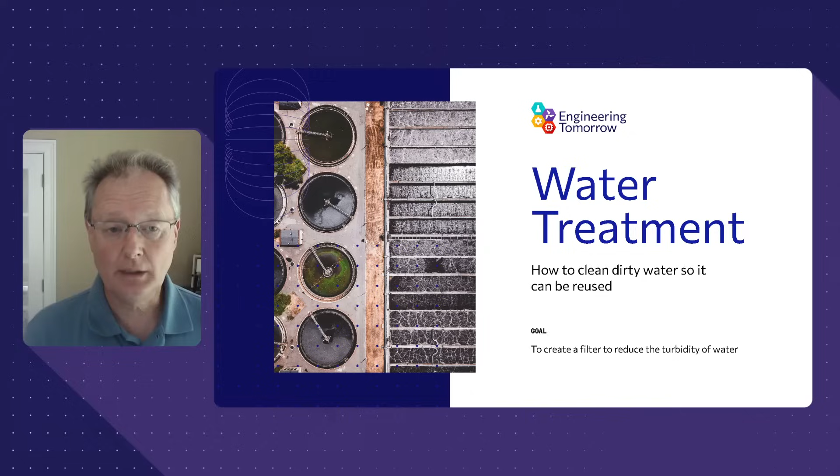So what I'd like to do is take you through the water treatment lab, and I hope you'll have some fun doing this. I'll give you a feel for how water is processed. We are used to just turning on the tap in your house and clean water comes out. Not everywhere in the world can that happen, and there's a lot of engineering that goes into making that actually happen.

As you may know, our labs are all developed by engineers and delivered by engineers. This one was developed by Edgar Martinez, who was a civil engineer. And then we also have engineering college students that help us out, and Mona and Caroline helped on this one.

So first question is, do you know what your water footprint is? Now, you may have heard of your carbon footprint, which is what is it that you do? Where do you travel? What is it you use that creates CO2? But what about your water footprint? A lot of people don't think about this because you use water for drinking and for cooking. You use water in your toilet, for showers and for baths.

That's the obvious stuff. But it turns out your water footprint is a lot bigger than that, because a lot of the products that you use use water, and a lot of them use a lot of water. Other than drinking, what did you use your water for today? And also, how many times have you used water?

So let's talk about what's in water that makes it contaminated. Roughly you can divide it into three different areas. One is suspended solids. So that's like you can see in that cup. It was a cup of clean water, but there's a bunch of dirt and gunk and things floating around in it, and it looks really gray and ugly. And you probably wouldn't want to drink that just because you don't know what's in there.

Now, those suspended solids, the good thing is they don't dissolve in the water, so you can see them. And you can actually filter them out, and you can also agglomerate them and settle them out. And that's what you're going to be doing in your lab. You're going to be filtering these suspended solids out. So that's one class of material that contaminates water.

Another class of materials are what we would call dissolved solids or dissolved materials. Probably the most common, or the one that you'll know the easiest, is salt. So the ocean has a lot of dissolved salts in it. That's why if you get ocean water in your mouth, it tastes really salty and disgusting.

That's a little harder. Those are already all in the water, and they're on a molecular or atomic level, and you can't just filter those out. You need to remove them through some chemical process quite often. One is called softening or ion exchange. Sometimes you can remove them through a membrane process, which is a reverse osmosis process.

Sometimes you can remove these materials, which can include gases, just by aeration or de-aeration. So basically getting the gases to release. Like for example, in your soda bottle, there's carbon dioxide in that. That's what gives it bubbles. And when you open up that bottle, you hear psst, and that's the beginning of the release of those gases from that water. So that's another type of material that contaminates water.

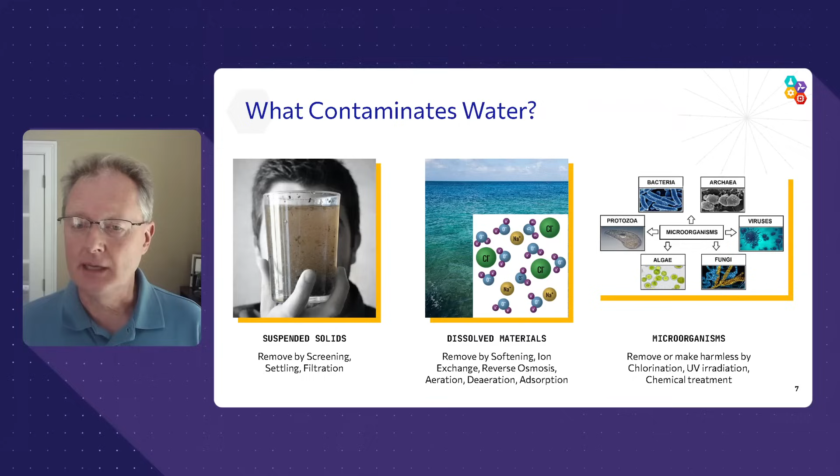And as a result, there's a lot of life living in water. So that's where you got your bacterias and your algae and your funguses and your viruses and protozoa. And if you're taking biology, you've probably recognized all this. Basically, the way you approach removing them is by killing these bacteria, so that if you do ingest them, they don't grow in your body and make you sick.

So the way that's done is usually through chlorination, putting chlorine ions in water. That'll rip these things apart and make them benign. Or you can also do it through ultraviolet radiation, radiating the water. That can also kill these microorganisms.

So in general, you want to have multiple process steps where you remove each of these in different types of process steps. And that's how water treatment works. It's typically not a single step. It's a multi-step process, which is very much what chemical engineers learn, and is very much a part of chemical processing. Water treatment is a multi-step process.

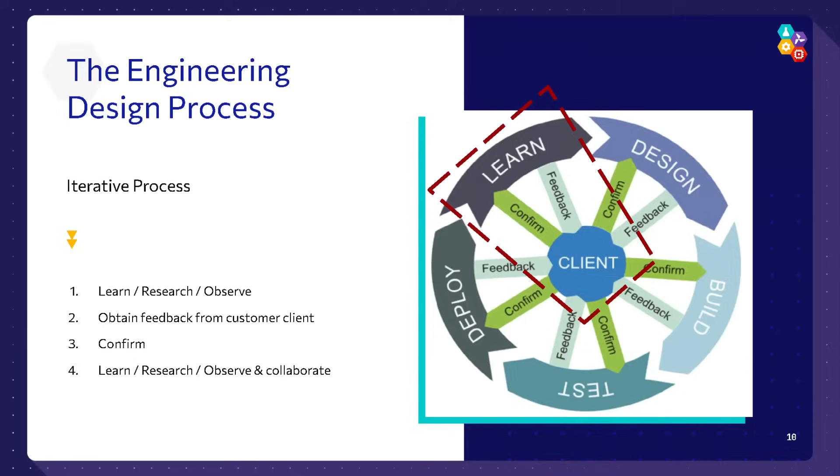So you've heard, I'm sure, of the engineering design process. Engineering is an iterative process. You'll use your basic skills in math and science and chemistry and biology and physics. And you'll get concepts, you'll put together a trial, you'll try it out, and you always have to try it again because you'll see things that don't work quite right. So it's a constantly iterative process.

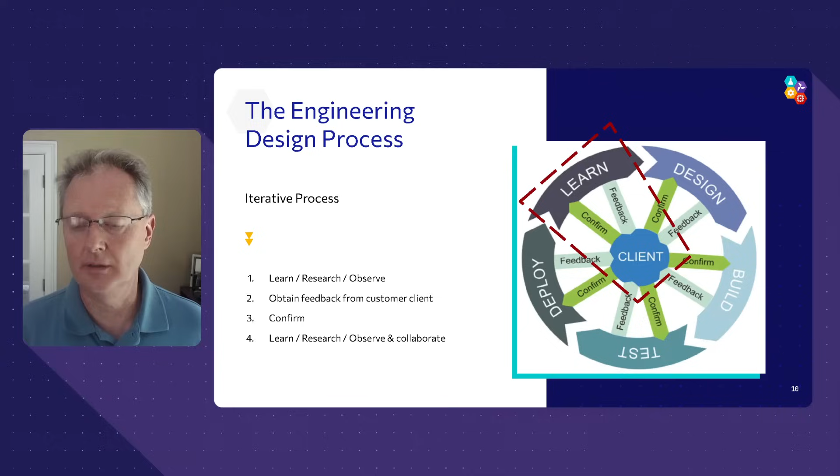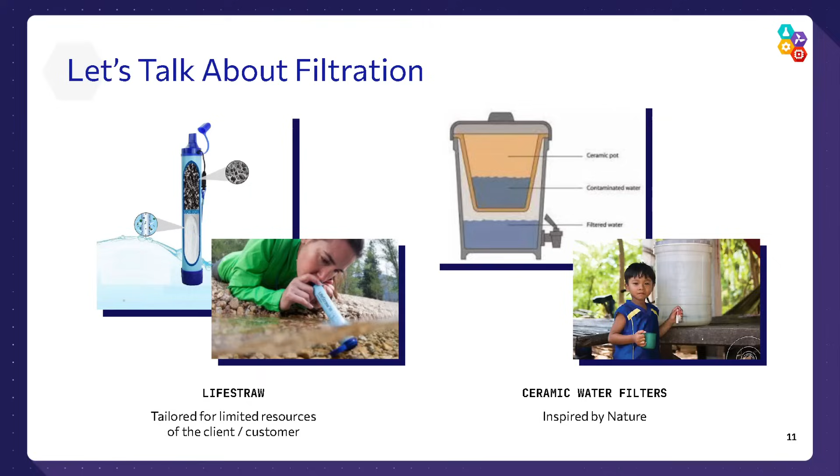I think there's probably a limit to how good water you can use this with. And then these ceramic water filters just give you an idea of another design process. And it says inspired by nature. I mean, quite often we look at how nature naturally treats water. The water cycle on Earth is naturally a cleaning process, and it's a great motivation and a guide to how we can then try to replicate that.

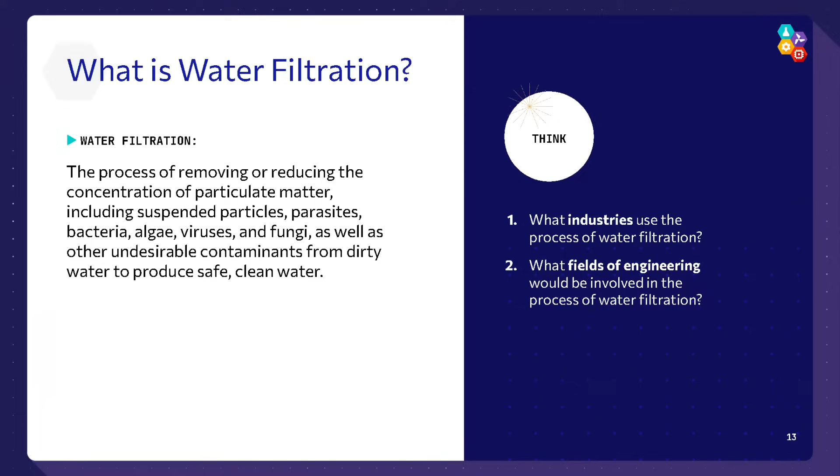This lab is going to focus on the filtration process. So what is water filtration? Again, it's the process of removing or reducing contaminants that are not dissolved in the water. So they're suspended solids. And what you're going to do is you're going to actually be using a variety of materials, filter materials, to try to design something.

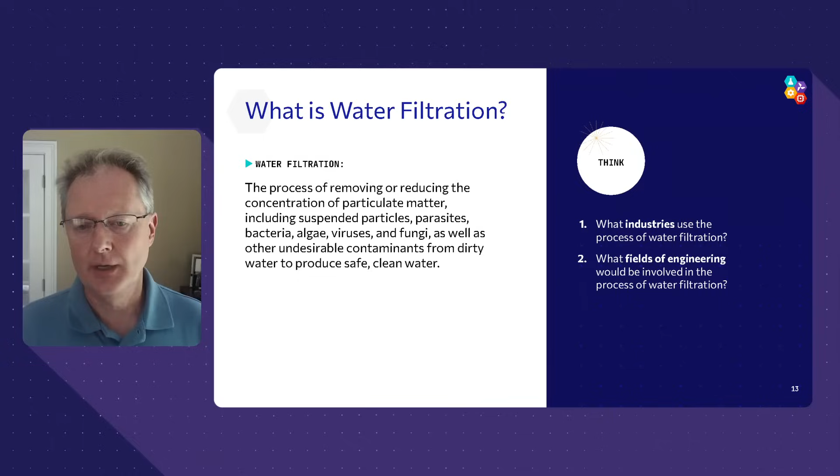So what industries use the process of water filtration? Pretty much every industry that uses water and has to have a water treatment plant so that they don't actually get it directly from their municipal source. But almost every process has some sort of filtration process. So this is quite fundamental.

So I've mentioned a multimedia filter a couple of times. So basically a multimedia filter is exactly what it says. Media is the material that you put in your filter. So it's the sand, it's the gravel, it's the stuff that you're going to have your water flow through, and it's going to capture those suspended solids. So a multimedia means that you have many different types of media. So this is an example of a multimedia piece of equipment.

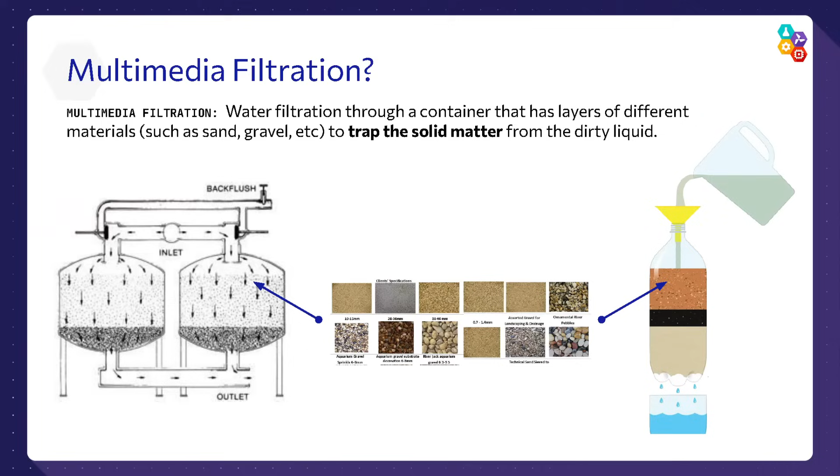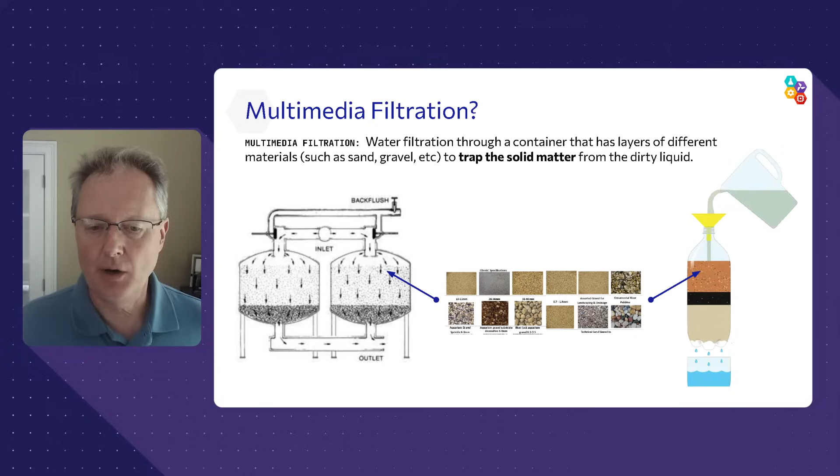You can see there's two tanks here on the left-hand side where you have water flowing in and the clean water is coming out. Obviously, you capture your contaminants in the media. So every once in a while, you have to stop the process, backwash it, actually have water flow back the other way. And then you can see there's a back flush valve there. That cleans the media out, and then you can start using it again. So that's a multimedia process. You're going to be making something that looks a little bit like what's on the right here, but we're going to show you how we're going to set that up.

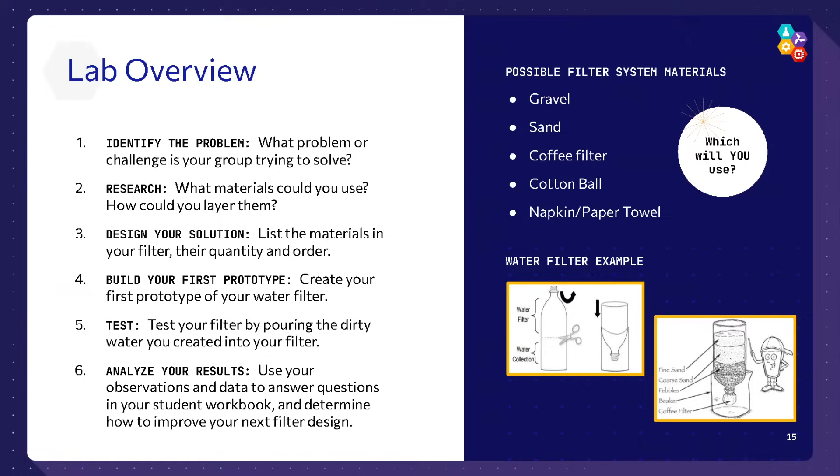So this is a better picture of what you're going to do. What we've done is we've provided you with a variety of media. So you should have some gravel, some sand. There should be some coffee filters, cotton balls. You can use napkins or paper towels. Maybe you can find other things. And what you're going to do is you're going to start with a plastic bottle, which you should have. You're going to cut it in half. And now you have the bottom of your experiment.

And then you're going to turn the top upside down, and you're going to build your multimedia filter in this top piece. So you can have layers of your materials in the top piece. One of the challenges you're going to have is how do you make sure not everything falls right through the cap of your bottle. You have to have some kind of a seal there or some way to hold it in place. You need to think about, what should I put in first? Should I put the finest material first, the coarsest material first? Let's think about if you wanted to capture first the coarse stuff and then the fine stuff later, so you don't clog up your filter. And that's going to be your filtration system.

So here's a few hints to how you want to think about it. You should try to build multiple. First of all, put thought into how you're going to design your filter, and then what is going to be, as I mentioned, the order of the materials.

One thing I should mention before we even get to the filter is you need dirty water. So we're not going to just have you find dirty water, because that's not a good thing. You're going to make some dirty water. So you're going to have a second bottle, and you're going to take regular tap water, and then we're going to have you add ground pepper, which is kind of a coarse material, and you're going to also add a little bit of cinnamon. Now the ground pepper is kind of coarse. The cinnamon is very, very fine.

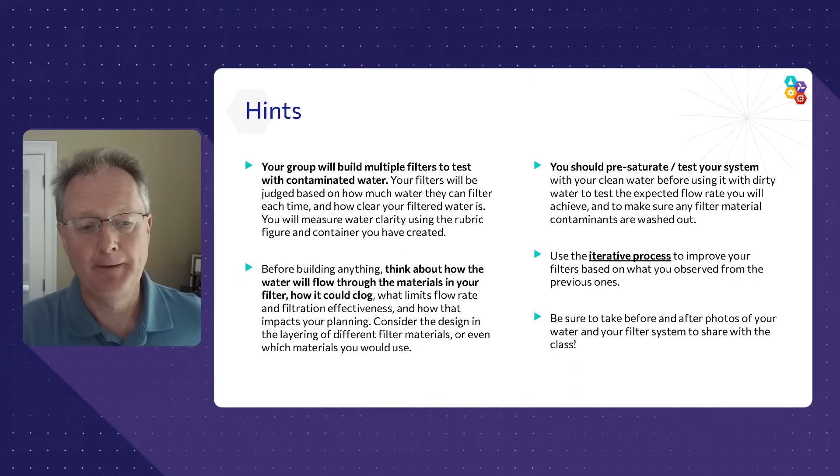And then when you're ready, dump out the clean water in the bottom part, and then pour your dirty water in and see how effective your filter is at cleaning up the water. And be sure to take some pictures so that you can compare. Now, what is it that we're going to be looking for? Well, before we show you what we're going to look for, here's a little video that is an example of somebody actually doing the filtration experiment. So you can take a look at that.

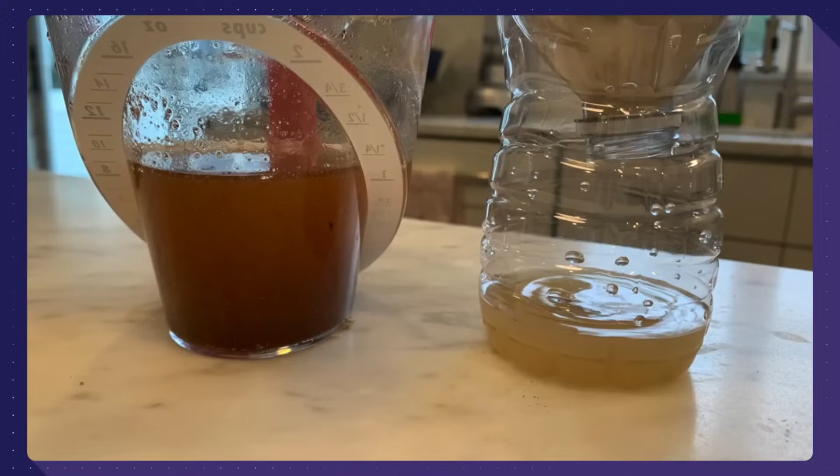All right, so you've seen from the video how you can build your filter and some of the decisions about what materials to put in, what order to put them in. So let's talk about what you are actually measuring. Now, the best thing you can measure without some extra sophisticated equipment is pretty much the color of your water. What that is a representation of is what's called turbidity. And turbidity is kind of like the transparency of the water. So how clear does it look? Does it look clean and clear? Does it look dirty and murky and mucky?

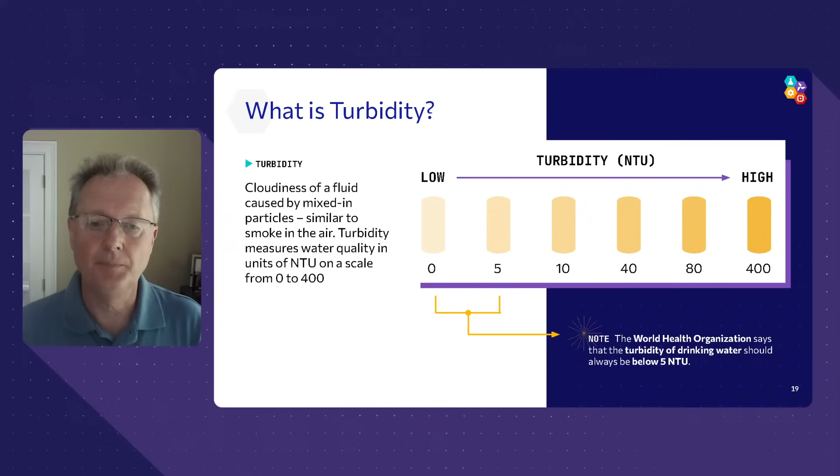Now, to measure turbidity, they have sophisticated tools. The way they work is that you take a little bit of your sample of water, put it in a very clean vial, put it in a machine, and that machine will shoot a light through it, or a laser light, I think it's laser, and it'll measure the intensity coming out. And then it'll calculate a more accurate turbidity number. But for your experiment, we can just use this scale. It's good enough. So originally you should have a nice and murky bit of dirty, cinnamony, peppery water, which should hopefully be up in the hundreds range.

And you should compare that to the clean water that comes out in your sample collection to see how much of that turbidity came down and how clean your water looks after you filtered it. Now, the units of turbidity are called NTU. If you'd like to know what that stands for, I would recommend you search it up. It's a complicated word, but that is a very well-defined measure of turbidity, and it's only valid when you use one of these sophisticated instruments that's actually measuring it.

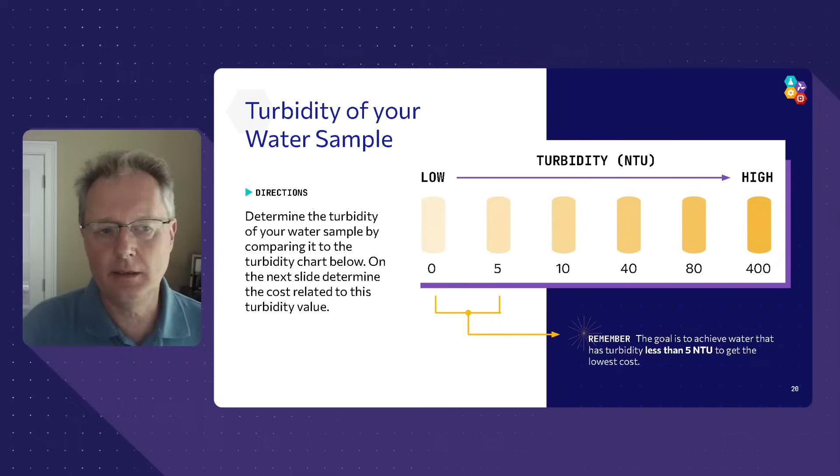Now, why is turbidity important? Think about it this way: you're developing one step in a multi-step process. The early step is your filtration. If you don't make a good stab at your initial clarification or filtration of your sample, then you're going to need to do more process steps, maybe another filtration or multiple filtrations after that. And that just costs more and more money. So what you want is a pretty good filtration step that you're designing.

But filtration and cleanliness is not the only thing. You also want to have a pretty good flow rate through your filter. So it's a combination of flow rate and cleanliness or turbidity that's going to be a measure of the quality of your engineering design. So just to put some numbers on the engineering design and the cost of it, we've given you some kind of arbitrary numbers. So if you have not cleaned your water at all, basically virtually no filtration, then you're going to have a cost penalty, and we're going to call that cost penalty $100.

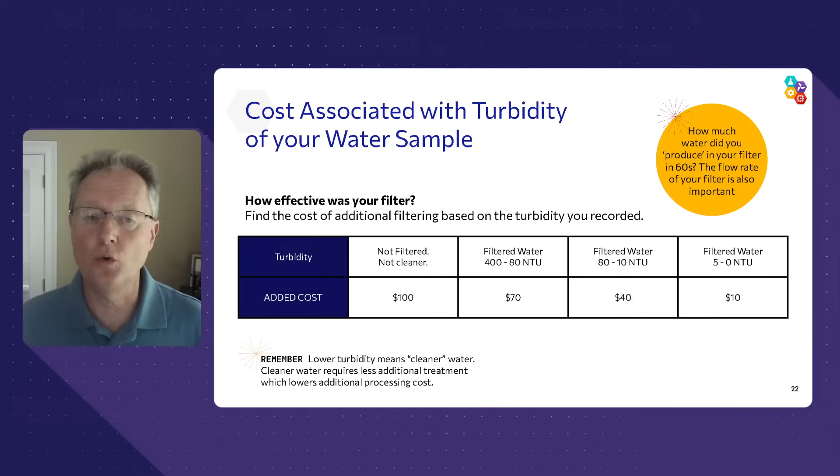If you can bring your filtered water down to, say, under 100, then the cost penalty is lower. So what you're trying to do is optimize your system so that you reduce your cost penalty. But that in itself isn't the only thing. You also want to try to produce a lot of water. So when you do your filtration, also measure how much water flows through your filter in 60 seconds and compare that with your friends in your class to see if you can get something that has a good flow rate, but also a low turbidity and a low cost penalty.

So that's basically the breakout. I hope you have fun with it. It's usually quite popular.

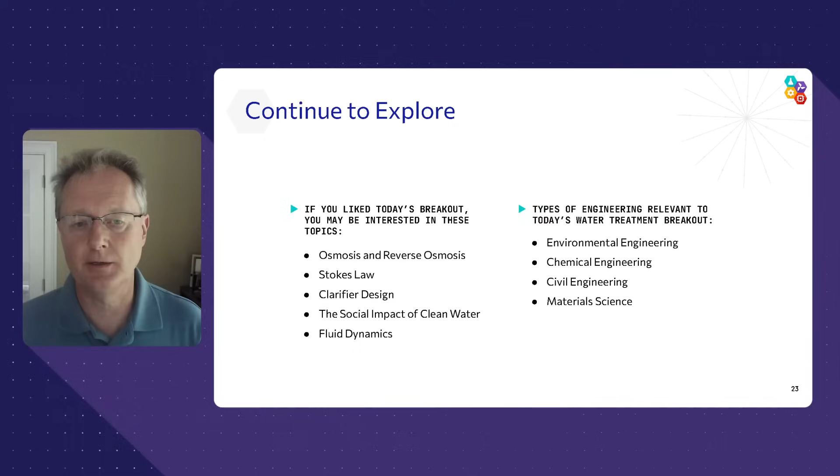If you really enjoy this, we do have an extension to this lab, which is more about settling and the settling step of a water treatment process. But also, if you're interested, you can learn more by exploring things like osmosis, reverse osmosis, fluid dynamics, Stokes' law, flow in porous media, clarifiers, and things like that. There are various engineering topics related to this. So I leave you with that, and you should go off and try your design and see what you can do as far as making an effective water treatment. So have some fun with that and enjoy.

You're going to use the same dirty water, the water that had the pepper and the cinnamon in it. But in this case, you're going to build a kind of a rudimentary settling tank. So let's see what this all means. Now, just to review, this is a different picture of an example of a multi-step water treatment process. So if you start with dirty water, we'll call it brown water, which is quite often what it's called in

the industry. Quite often the first step that the water will go through is called settling, which is what I mentioned in the other lab, where you add a chemical to the water so that the particles start to coagulate, flocculate. You create floc, and then you let that floc settle to the bottom of the tank, and then you take it away, and all the clean water is on top. So that removes large suspended solids.

If you're going to design that from an engineering view, the basis for that settling rate is called Stokes' law. We'll talk about Stokes' law in just a minute, but you can see what the formula looks like right there. After that, you'll typically go into a filtration step. It could be a multimedia filter. There's microfiltration, ultrafiltration. From there, quite often you'll go to a reverse osmosis. And by the way, this is for generating very clean water. And then from there, you might go to a disinfection step, and then now you have clean water.

So just to give you a better feel for this settling step, a clarifier is a very large industrial scale tank for letting the water, the coagulants and the flocs settle. The picture at the top right is an example of that clarifier. If you've ever driven near a water treatment facility, there's a very good chance that you'll see something that looks a little bit like this, a very large circular tank. And they'll have a paddle that slowly rotates and gets the floc to form and then settle out.

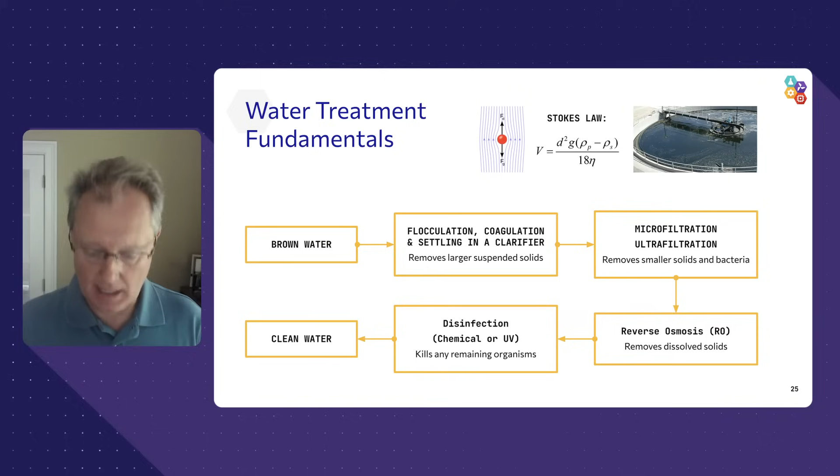So let's talk about, once you've got floc in your water, how fast does it settle? Because you need to know that in order to design how long the water should sit in that tank. And that's determined by something called Stokes' law. Stokes' law is just the formula as you can see. V is the settling velocity. The particle diameter is d, and that goes to the square. Really what you're trying to do by coagulating small particles into larger ones is to make that particle size d big, because the bigger that gets, the faster it'll settle out, especially to the square.

The other factors are not that variable, honestly. g is the gravitational constant, that's constant. The densities, rho sub p and rho sub s, are basically the density of the coagulant and the density of water. Obviously, density of water is relatively stable. And then the eta, or that's a nu, I guess, on the bottom, another Greek letter, that's another factor called the dynamic viscosity. And again, it's a variable that doesn't really change. So the biggest variable you have to play with here is d, the diameter of the particle that you create.

So you could just plug these numbers into this formula, and we have a couple of questions there. If you have a particle that's 10 microns in size, and you can see how many that is in meters, you should be able to calculate how far it'll settle in 5 minutes. And then if you make that particle 5 times bigger, how far will it settle in 5 minutes? I'll let you do the math on that, and I'm sure you can work it. So what you're going to do now is make a simple clarifier.

So we're going to start again with a bottle, just like the one we had before. So this is going to be your clarifier process. What you should do, again, is cut the bottle in half. But in this case, instead of making a filter like that, you're going to take the bottom half of the bottle, and you're going to punch some holes in it. And those holes, they should be all on the top, on one side of the circumference.

I don't know if you can see it. You may not be able to see it. You can maybe see it there. I've got the picture where you can see the 3 circles. I used the scissors to punch some holes in the bottom of this. You might do better if you could make the holes a little bit smaller. So maybe use something that's sharp, that you can get through that, but don't hurt yourself.

And then what you're going to do is you're going to take that settling tank, which is basically what this is, and you're going to put it inside the top half of the bottle. So I can put it in like this. And now what you've got is a little settling tank. You keep the holes at the top, and that's going to be something that's called a weir. So basically the water will sit in there until it gets high enough, and then it'll start flowing through those holes over the top.

And what you can do then is put your settling piece of equipment here at an angle. And if you slowly pour your dirty water into here, you're going to see that the water will mostly stay on the bottom. You're going to start to have some settling, probably of pepper. And then as you start to let it go higher and higher, slowly, don't pour it in too fast, the cleaner water will flow over the top over your weir and into the bottom part of this.

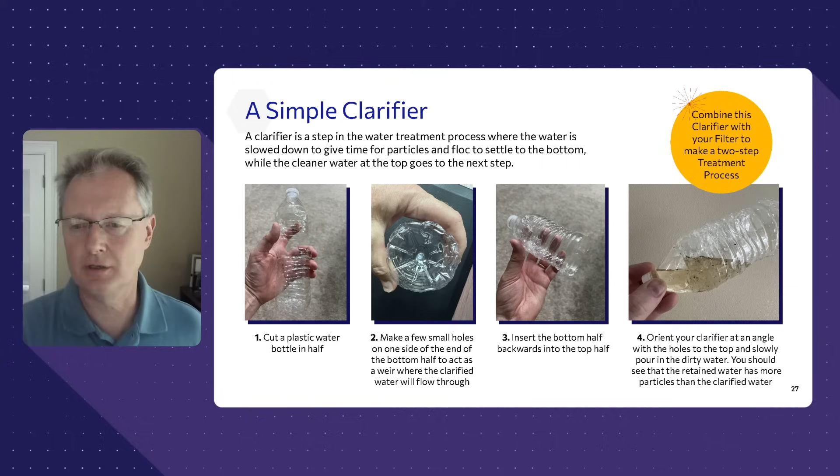So then a couple of things to consider. Can you build a structure? Can you build a stand so that you can hold your clarifier up and then it'll automatically flow into the multimedia filter? How does the speed at which you pour this in impact the effectiveness of your settling tank? Does it matter how many holes or what pattern of holes you use as your weir in your settling tank?

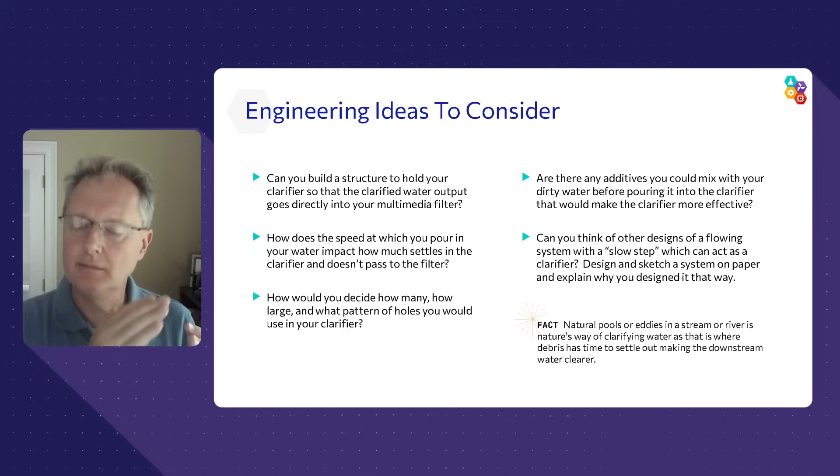Could you mix your water with something that makes it more effective at settling, a coagulant? That could be tough. I don't have an answer to that. There are a lot of coagulants that they use in industry, but they're not things that you typically find around the house. And can you think of other ways of designing a process, a piece of equipment that slows the water down so that things can settle out, and then finally, lets the clean top layer of the water flow further?

So just to think about this, if you think about how a stream in nature works, you have water flowing down, and there'll be places where there are slow spots in the stream because of the shape of the stream, or there could be eddies or rocks that'll slow it down. And it's around those slow spots that you start to get silt depositing. And that's exactly the same process that we're talking about here. By slowing down the water as it flows, you give it time to settle out the heavy stuff. And then the cleaner water continues on.

So that should be it. So that's a little bit of an extension activity that you can do to the original water filtration lab to make a multi-step process. So I hope you've enjoyed the water lab. It's very much a topic of importance in the world today. It's very much a place for chemical engineers and environmental engineers, and also mechanical engineers building equipment for pumping and everything, and also civil engineers, because large civil works are involved in building water treatment plants. All kinds of engineering goes into providing clean water for you, so when you turn your tap on, you can have a drink.